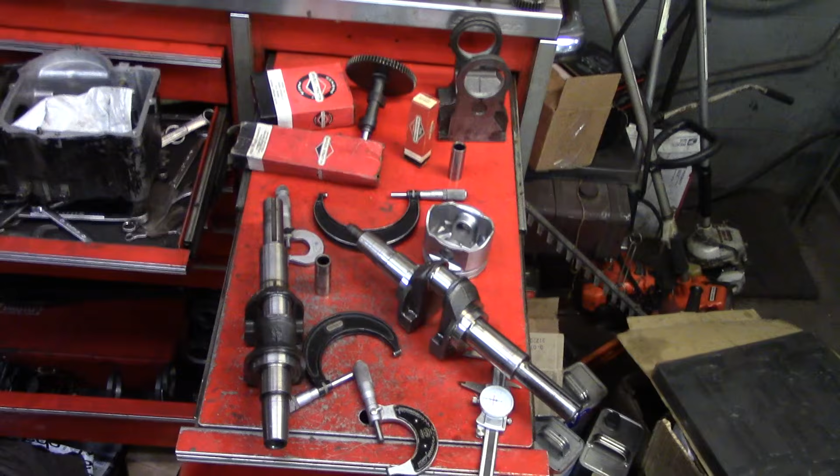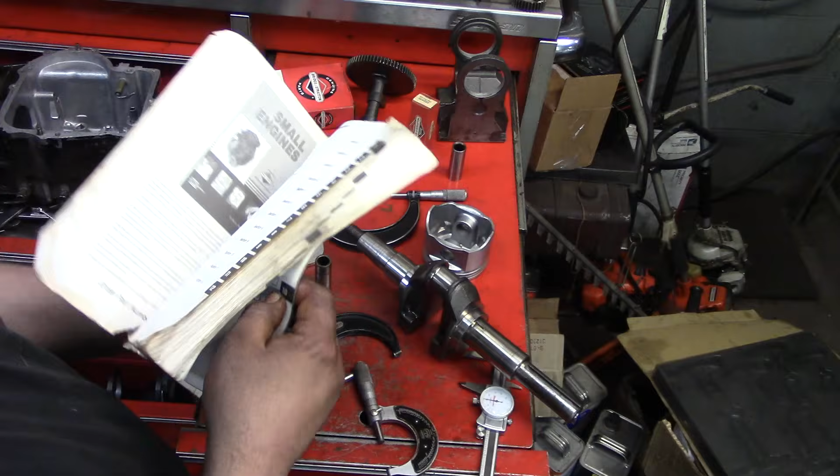I'm going to show you miking up some of these Briggs and Stratton 12 horsepower engine parts. We're going to be using this manual here, okay? Now some of the things we're going to go over, we're going to measure the crankshaft journals for 12 horsepower.

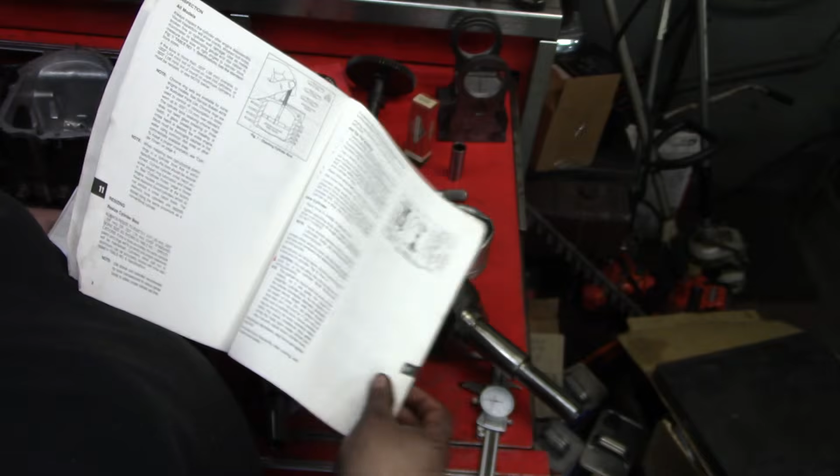This camshaft, this is the lobe. This is actually reject sizes. They give you the reject sizes in here. Reject meaning, you know, you need a new one, okay? Let's see. Cylinder bore. That's a stock cylinder bore, okay? For this motor, it's 20 thousandths. So add 20 thousandths to this number, and that's what we're going to be working with.

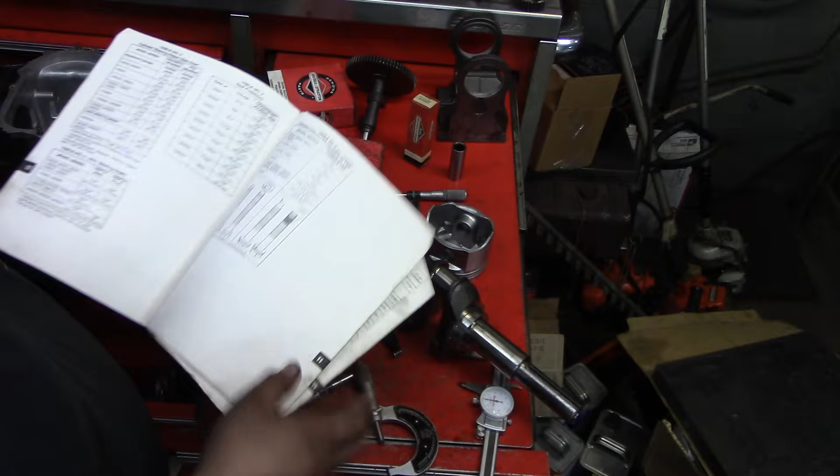I'll talk about piston clearances a little bit. I mean, it doesn't have to be this crazy, but I'm trying to build these motors almost like a factory short block for myself. Hard to get parts for, okay?

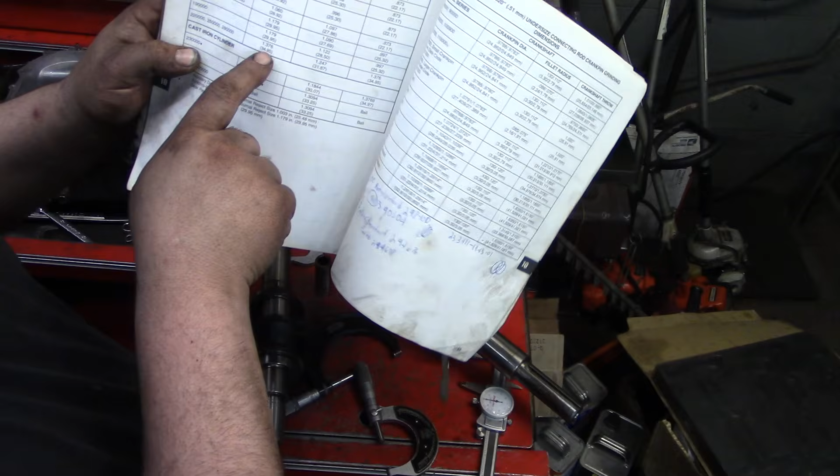Alright, now, crankshaft. Reject: 1.376, okay? Same thing on the magneto, same size. Crank pin, 1.247, okay? It's reject size.

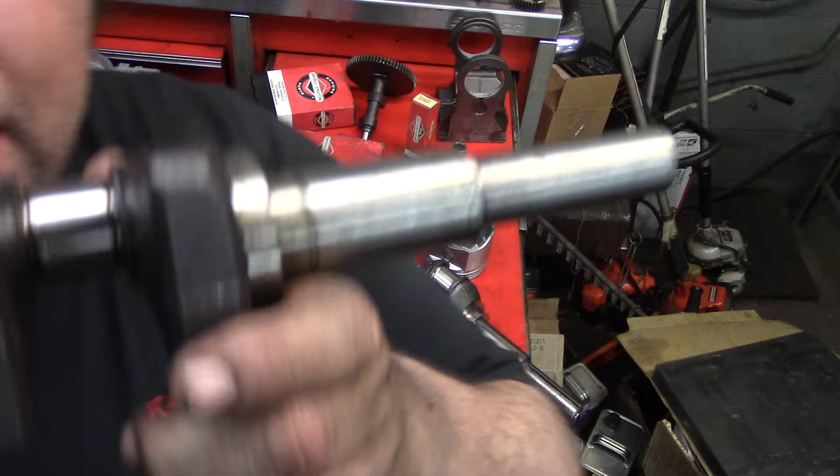Alright. Let me show you a bad one. Okay, it's a bad crank. See that? Let me see. Get down here. So it wore like that, if you can see that. Step. That's probably about 3 thou. That's too much, okay? Try to zoom in, show you the mic measurements, okay?

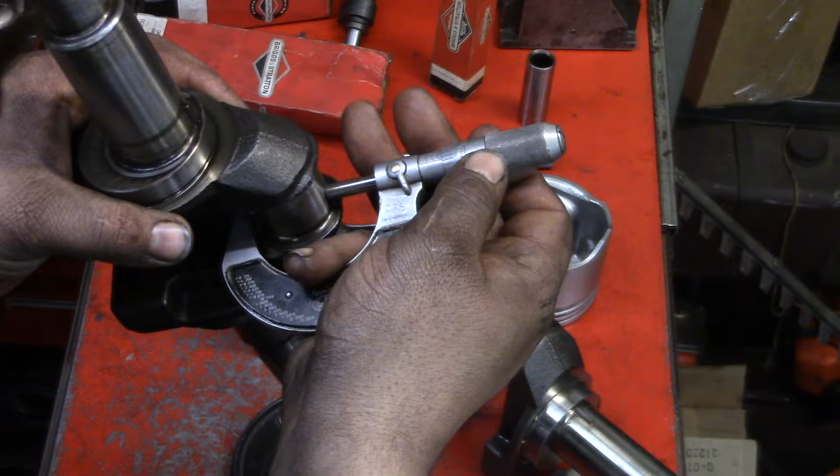Crank pin. Oh yeah, see that? 1.246. So that's no good. Okay, that's the bad crank. Go with the good crank.

1.249. Perfect. Okay. Now I'm going to show you the main journals here. Bigger. Okay. 1.378. Pretty good. 1.378. Okay, that's also good.

Okay, now on these eccentrics, like this crank here, you can replace these on this style. Now I think brand new, and I've seen this number vary on these eccentrics, I think it's 2.205, but I have seen them vary a few thou from brand new. Measure these.

Okay. It's 2.2035 about, okay? That's pretty good. Like I said, I've seen these vary a few thou. See? Brand new, it's the same spec. Okay? Same spec.

I'll show you a connecting rod, okay? Something to look at. Now this one's a used connecting rod. You can see down there, you see a little bit of machine marks. This is a used rod. You see the machine marks, usually, you know, you got a good rod, okay? I'll show you a brand new rod.

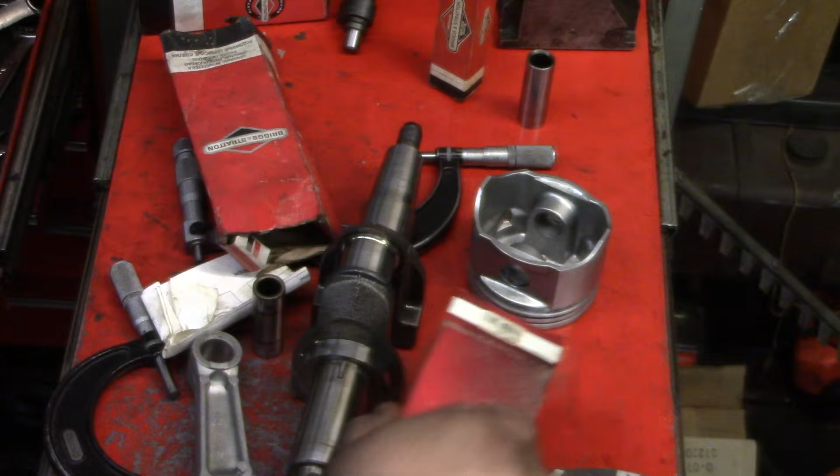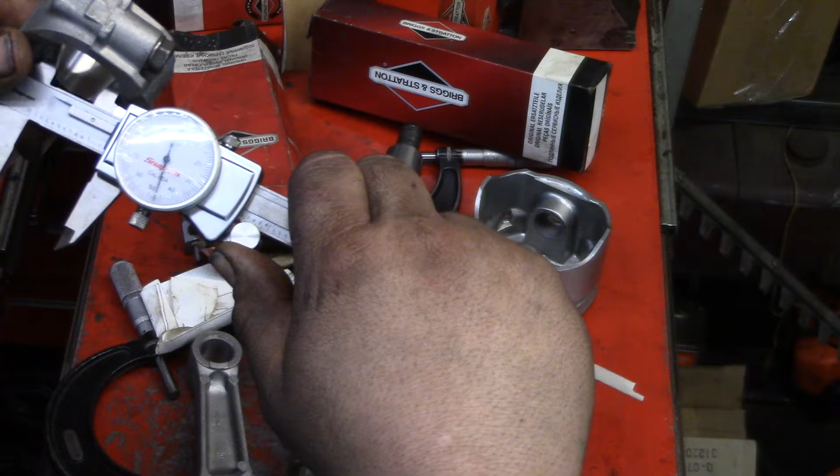Brand new rod, new old stock. Brand spanking new, okay? The only way I can measure this is like this. I already know. See that? Let's see. 1.249. Really, really close on these. Okay, yeah, 1.249. That's your brand new spec on these rods.

One that's got some use on it. That's still good. Yeah. 1.249 and a few tenths. Yeah. There you go. So pretty good yet. A good rod.

Little update for these motors. This is the number for the rod with the 2 different size bolts. That's an upgrade for these motors. See if I have a junk one here. I should. Let's see, one of these. Yeah, okay. I'll look down in there. So there's no machine marks.

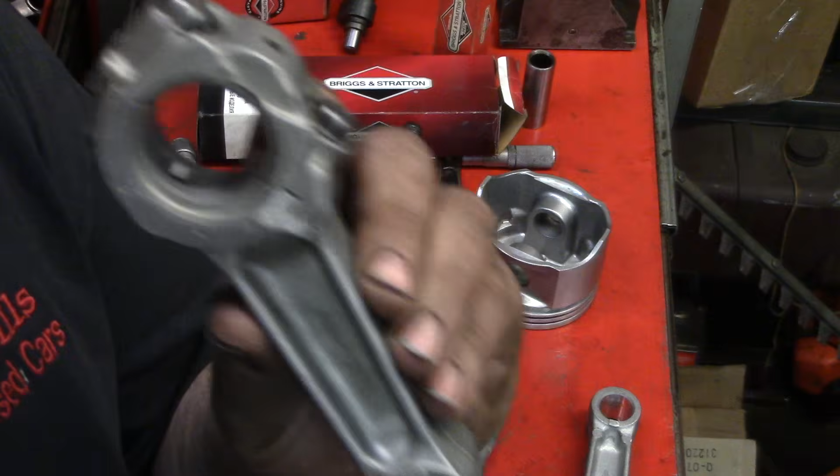Okay. Now the reject size on the crank pin on the rod is 1.252. Okay. I'll show you that in the book too. This one's, I mean, it would maybe run.

I had it, yeah. It's 1 inch, 251. If I check these and I use mics and set it, I can get it closer, but that's not a good idea. If you're really checking the parts, you want to use the right tool. You're just getting a general idea what the size of things are. Okay, let me show you.

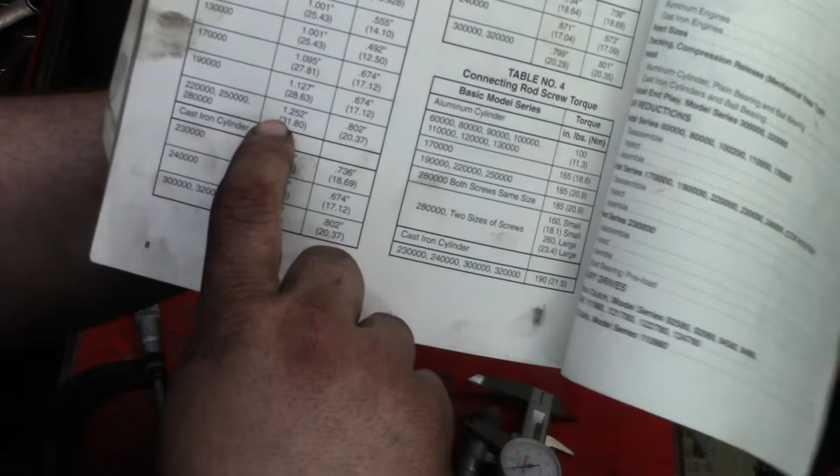So I was looking for... okay, that's what I was talking about. I understand this reject size: 1 inch, 252. Piston pin size on the connecting rod is 802 thousandths. Okay, now we're going to measure a piston pin here. This is the piston bore. This is 801. The piston pin reject size is 799 thousandths. I'm going to show you a brand new one.

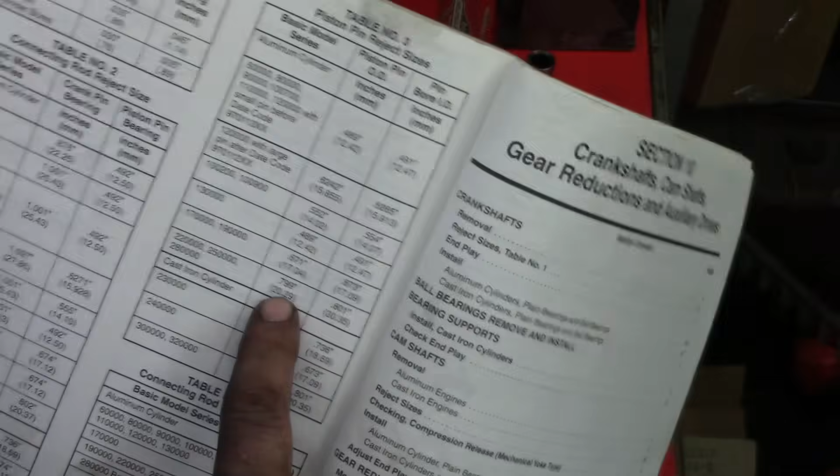Okay. This is new old stock I found online. Brand new. Not that crazy about this. Like I said, I'm a little picky on some of these motors because, okay, this is 800 thou and a few tenths. See if there's any taper. Yeah, same, 800 thou and a few tenths.

Now this is out of a used one. This is a pin I kind of cleaned up. I'm going to show you something. Check this out. A little bit more meat on it. There we go. 800 thou and 5 tenths. Okay, that's hard to believe.

So you will get variances sometimes in new parts. If I was making it, it'd be right on. This is 800 thou. See that? Like I said, you don't have to get that crazy. It'd probably run, but I got reasons. Okay, and we're gonna go over to the camshaft.

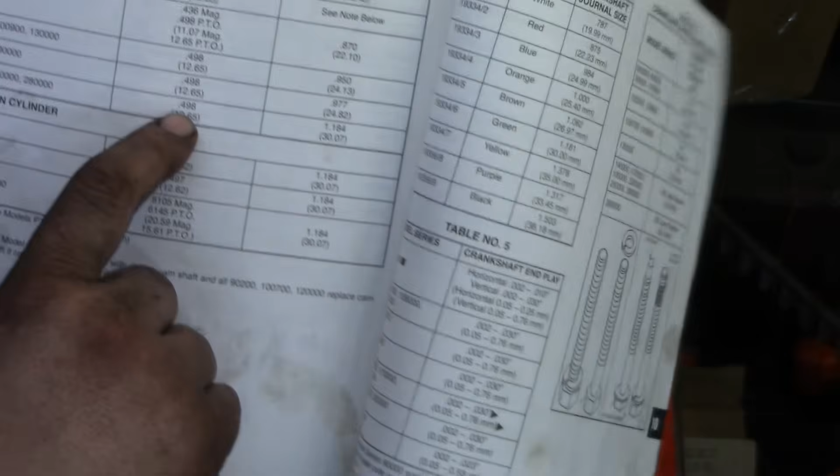Okay. Camshaft, or wait a minute, back here. Camshaft reject sizes: 498 on the journal, 1 inch 184 on the lobe. But like I said, I never seen a lobe on these L-head motors wear out. Let me show you more of a performance cam, for torque. Briggs used these in some of their motors back in the late 70s, early 80s.

Now this is a little secret. I'll show you. See that? 1 inch 255 on the intake side. That'll give you more torque. The others are about 1 inch 200; that's pretty much what all the cams are that Briggs went to. I'll do another video about that, but it's something I discovered accidentally. Okay, this is the cam I'm putting in this motor.

Okay, about 1 inch 200. Same thing here. Like I said, I've never seen these lobes wear out. Go with the journals. I know these journals are pretty good. Okay. 499 and about 5 tenths. 99 5 tenths. Good. Perfect. It's almost new. Yeah, 99 5 tenths.

Okay, now we're getting to the piston. I want to talk about oil clearances. Now, I bored this motor out in the channel. This is the size I came up with, 3 inch 453. This piston has a little bit of time on it. There's a little bit of little marks on it. It's not horribly bad.

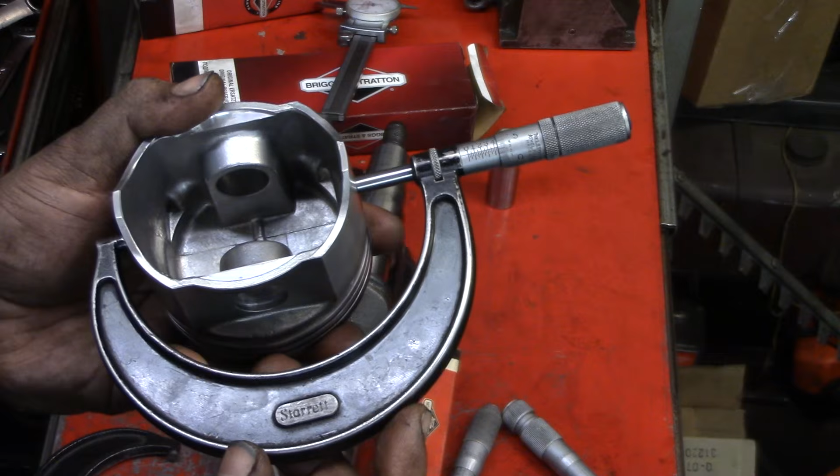Okay. Generally, yeah, let's see, let's get it better. There we go. It's 3 inch 453 and about 5 tenths. Okay. Yep. So we got about a 3 thou oil clearance on it.

So the stock bore is 3 7/16, which is 3.4375. The minimum size is 3.436 and 5 tenths. So this one is 20 thousandths over. I'll show you measuring some of this stuff. Bore. Like I said, you might not have to get this crazy, but just for fun I'm doing it that way.

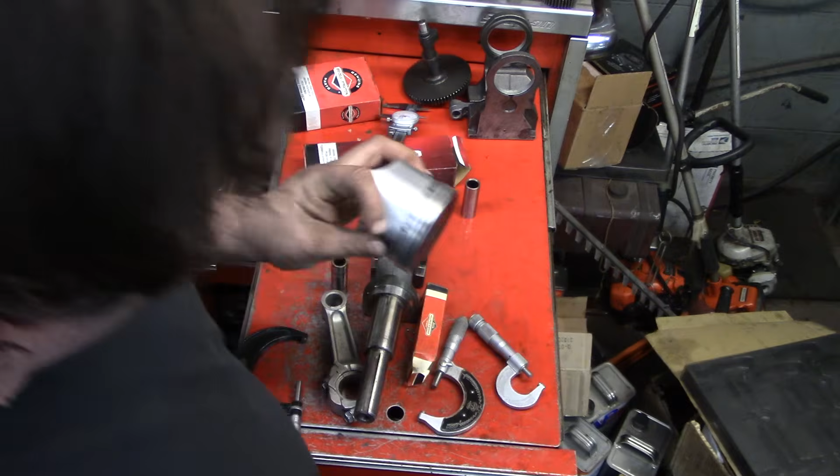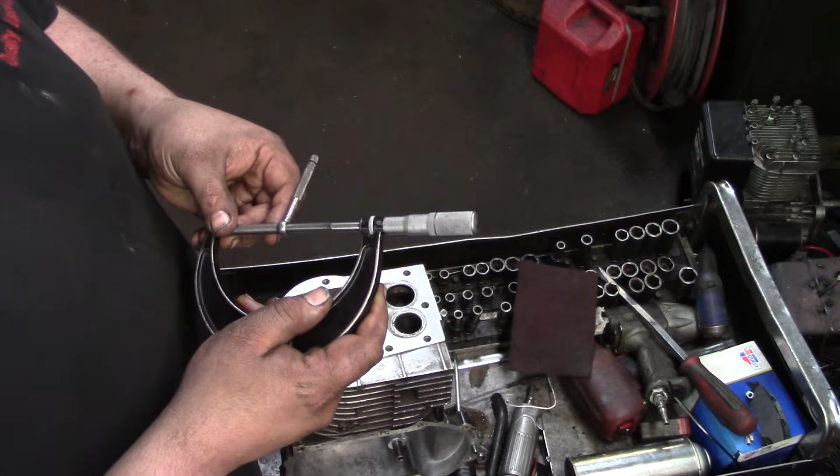Here we go. Okay, there's the bore size. Now these read probably a couple tenths big. These can be pretty tricky, so be careful using these when you're checking. So we're about 3.4565. Okay, 56 5/10. So there we go.

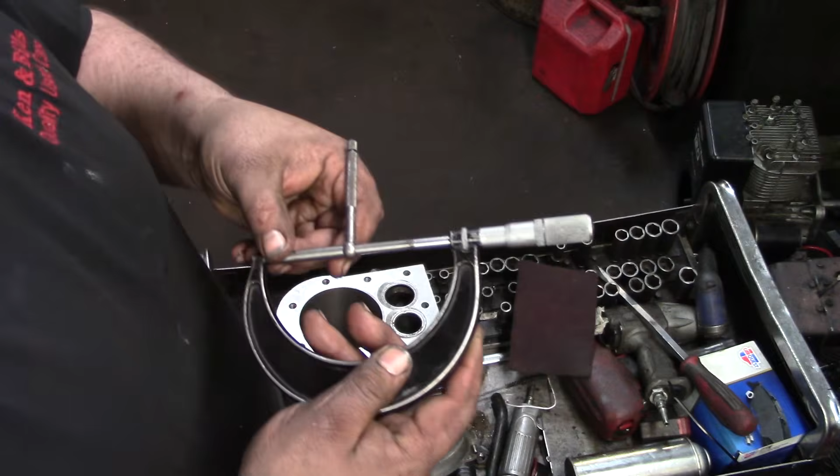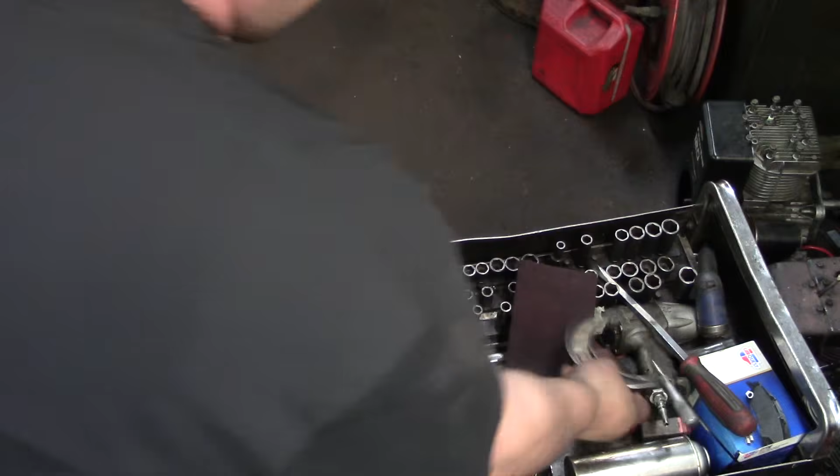There's that. See that? Okay. Go down a little bit further. You want to measure top and then at the bottom of the bore. There's taper, if you bore it yourself, like I did. That was a heck of an experience, I think. There we go. Yeah, see that? 5/10 almost perfectly. It's 3.4, 56 5/10. It's been a long day.

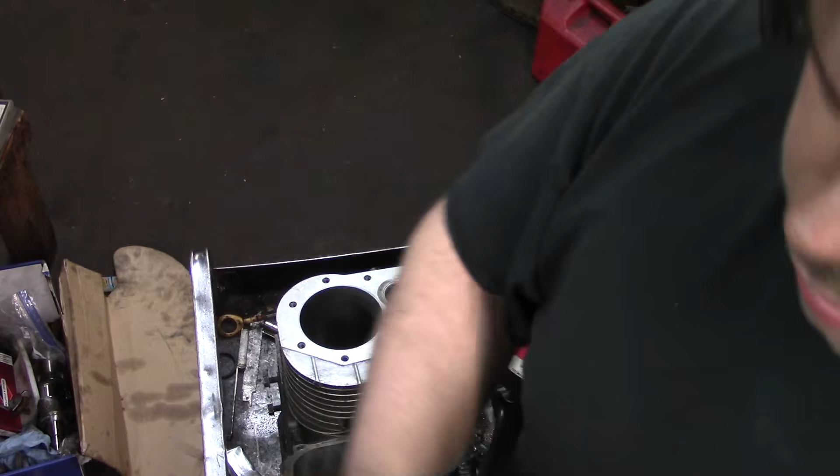Okay, so right there is telling me I got about 3.5 thou wall clearance. Okay, pretty good. I'm going to show you a piston ring gap. I'm going to try to see if I can zoom in for you. Now on these Briggs and Stratton, you want these style rings. Them Stens rings, I don't like. I'm going to show you what I'm talking about. Let's see. Yeah, this style of Stens piston ring with the oil expander, I don't like these. These are too tight. Not made right.

So if you can, try to find Briggs and Stratton piston rings. They just fit better, feel better. I had a bad experience once. So, yeah. Put the piston ring down in there. What you're doing, you're checking the piston ring gap. Use your piston to set the ring. Place it down there about 1 inch or so. Make sure that's straight. Okay, see.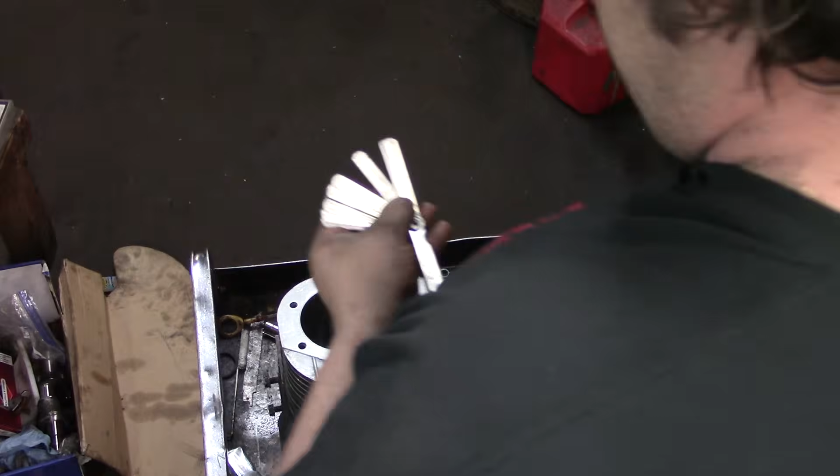Now on an engine like this, your piston ring gap, which you want brand new, especially with a brand new bore, for every inch of bore, add 4 thousandths. So we'll call this 3.5. So 3 times 4 is 12. It should be 14 thousandths, 14 to 15 thousandths, because what you don't want to have is ring butting, as they say. You check. These ain't the good feeler gauges. There we go. Find the good ones. Ones that got the step on it, I don't like them. I think they're junk.

Okay. 15. I can show you here a little bit. This is the oil ring. That's what you're doing down in there. This is about 15 thousandths. See the gap down in there? It's about 15. A little bit of drag on that. It's 15. Check one of the compression rings here. I know I did these rings. This is a brand new bored cylinder. So about, yeah.

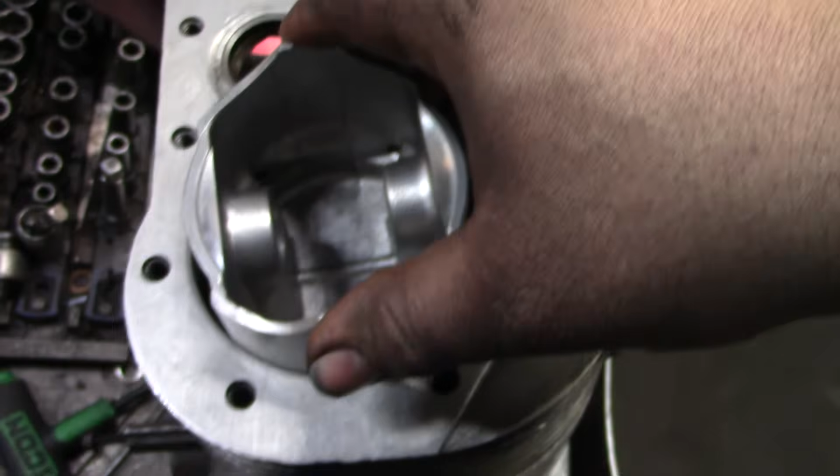That's, I think that's the second ring. Okay, let's go with the first. First one should be a little tighter. There we go. Always use the piston to straighten them rings out when you put them down in there. So I'm trying to do this one-handed. At 15, pretty good. About 13 to 15 in there is what you want, because what you don't want to have happen, these engines heat up and these rings possibly butt, and there goes your motor. So yeah.

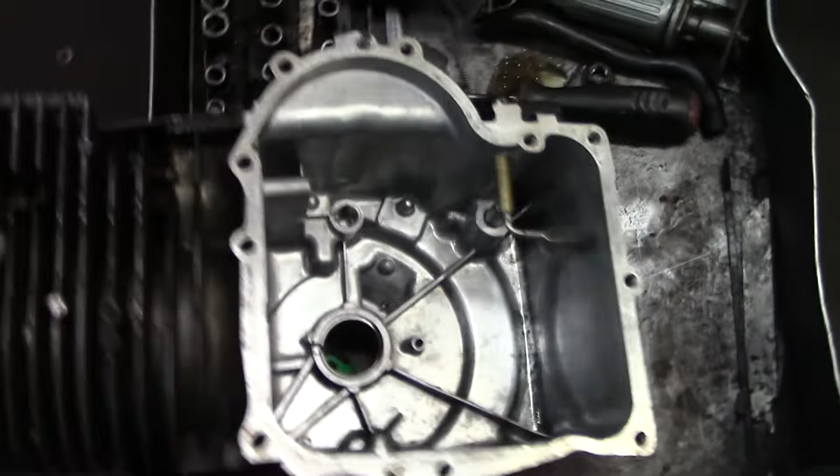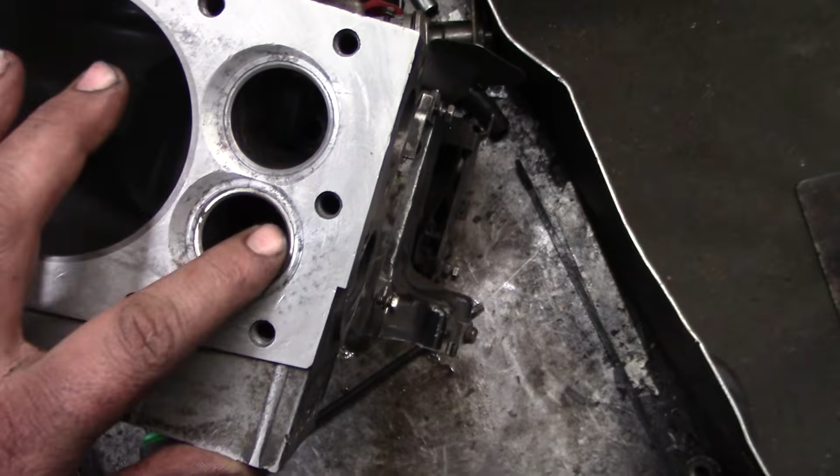I surfaced this block myself with the file method, something I don't recommend if you don't have experience. A lot of times this bearing really doesn't go bad, but that DU bearing, that's what they call it, that is a replaceable bearing. If you can get them, you might be able to do some digging. These valve seats, sometimes you gotta watch. Sometimes these seats will get loose. You might have to peen your block. That's why sometimes you may not have compression. These valve guides, I've never really seen them go bad.

Yeah, so I hope that video was useful for you guys. I just thought it was pretty cool to do this. Kind of fun.